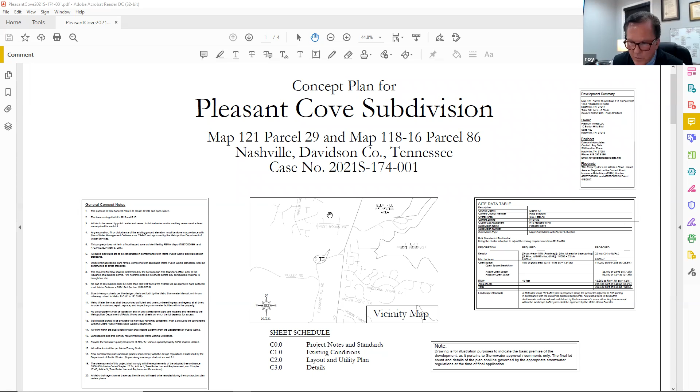I'll show you where the property is. So here we are. So this is Pleasant Hill Road, and this is the subdivision that it abuts. Russ, I'm not sure what the name of that subdivision is, but it abuts a dead-end cul-de-sac called Island View Court. And so this property has a point of access there. It also has a point of access on Pleasant Hill Road. Again, it's zoned R15. It's 8.96 acres.

And so there's a provision in the Metro zoning ordinance that allows you to develop properties in a manner called a cluster subdivision. Most, if not all, subdivisions right now are done as clusters because of Metro stormwater requirements; you have to have some open space, you have to have stormwater areas, and those almost all the time have to be outside of lots themselves. And so when you're developing a piece of property knowing that you're going to have these important features, you will utilize the cluster option because you can create lots and you can also create open space. What the cluster provision allows you to do is make lots smaller. You cannot increase the number of lots, but lots can be actually smaller.

So an R15 zoning, if I go too fast, you stop me at any time, Russ, okay? So an R15 zoning means residential 15,000 square foot lots. The R designation also allows you to build 2 houses on a single lot. It does not allow you to do that on every lot. It allows you to only do that on 25% of the lots. I think the subdivision that we're abutting was done as an old zone lot division years ago, where you could actually have 4 houses on one lot or 2 houses on one lot, and the lot line went right to the middle of the houses. So that's quite unusual itself. Metro does not allow us to do that anymore.

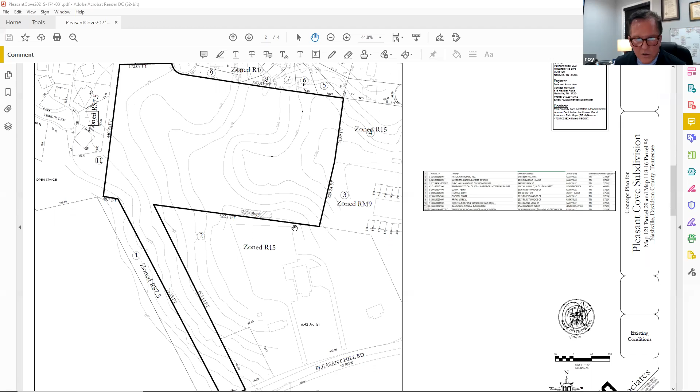So you'll multiply the total area by 43,560. You'll take a percentage of that, 85%, and then you divide it by the base zoning, which in this case is 15,000. And when you do that, you're allowed to have 22 lots. So I did a plan that basically divides this property into 22 lots. And more or less, this is what it looks like.

There was a reserve parcel at the end of this street that my client owns. So we're going to access Island View Court. Before we did a plan on this at all, there was a sit down with planning, just to see that they were generally okay with what we were proposing. And they said that we were. And so, this is the step. We have submitted this plan to the Planning Commission for review. They're in that review process right now.

So this road off of Island View Court comes in. This property is split down the center with sort of a hammerhead at the end. You could put a big round circular turnaround there, which Metro requires from a fire marshal perspective, or you can actually do what's called a hammerhead, as long as this distance is not more than 150 feet. And it actually allows you to lay the property out a lot better by not having the big circles in there. So they're really nice rectangular parcels. So you can have 22 lots.

Under the R zoning, 25% of those lots can be lots that you put 2 houses on, but those lots have to be full size lots of 15,000 square feet. So you'll see that here's a larger lot. Lot 18 is a larger lot. Lot 22 is a larger lot. Lot 8 and lot 9 and lot 10 are all larger lots. You could put 2 houses on each of these lots. The lots that are narrower and they're 60 feet wide would have 1 house each. So that gives you the ability to have 22 lots with 5 of those lots having 2 houses. So that'd be 27 total units.

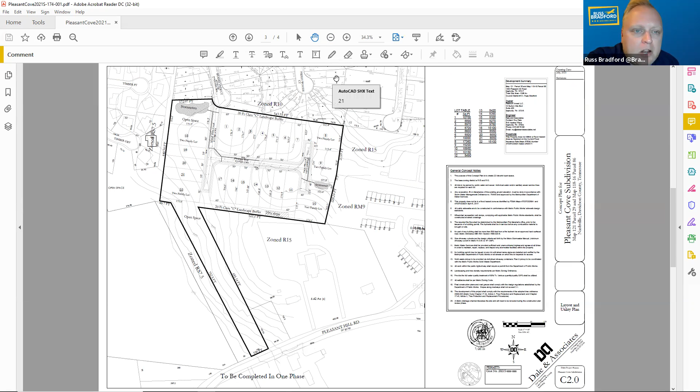And one question I have with the open space that connects to Pleasant Hill Road, was there a reason why that area wasn't looked at as being the way into the community and not coming off of the other cul-de-sac? Because there might be some concern with the people who live on that cul-de-sac. I'm sure there will be. I mean, I looked at a lot of those, and a lot of those probably are rental properties. It doesn't make any difference. There are people that live there.

And my client went to the planning commission on the front end to look at more or less that. I think the thought was that if you connect to Pleasant Hill, then you're going to be forced to make that connection to Island View, and then it's going to be a cut through. So it's something that we can certainly talk about. I'm not sure if people would want that connection or not. Planning in their review, although they looked at this before, came up with the same question again. So it's something that they're considering. There may be some alternative here we can talk about outside of this subdivision itself. I just want to hear what people's reactions are, I guess.

Is there anybody in the meeting that lives on that cul-de-sac? If there's a local resident on this call, feel free to either unmute or put your questions in the chat.

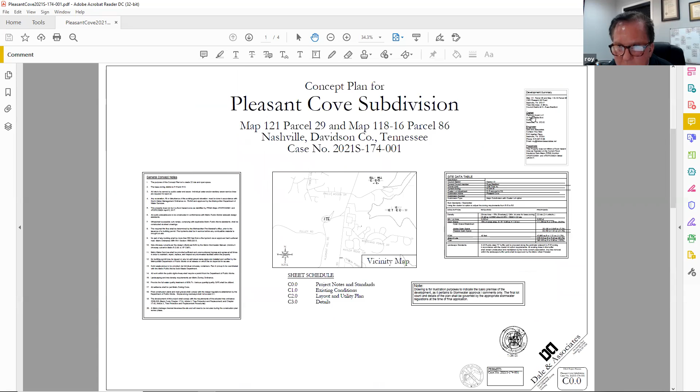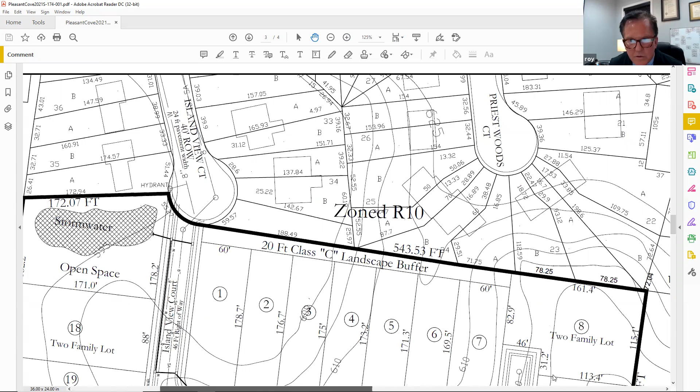And who is the developer or the builder? Well, he has a company, but his name is Bruce Little. Little or Whittle? Little, Little. And what's his company? I think it's on the plan. I think he has a couple of different companies. You know, people set up LLCs for individual projects, and this is the LLC that I think they set up for this one. And it should be on the plan that I sent you. Platinum Invest LLC.

And Roy, can you explain the concept of the two houses on one lot? Sure. Would they still be single family? Are they duplexes? How would those be laid out? So when you have an R zoning and you're allowed a, we'll call it a 2-family lot, you could do a duplex, or you could do 2 freestanding buildings. What I've tried to do is to lay this out so there's enough room to do 2 independent detached buildings. That's why these particular lots are wider.

That cannot. And so essentially in the eyes of Metro, just for terminology's sake, we call all of them two-family dwellings, whether they're attached or detached. To allow for independent ownership, they would need to set up horizontal property regimes on each lot to do split sales. Otherwise, an owner would own one side, rent the other side, or own one structure, rent the other, without the HPR to enable split sales of the property.

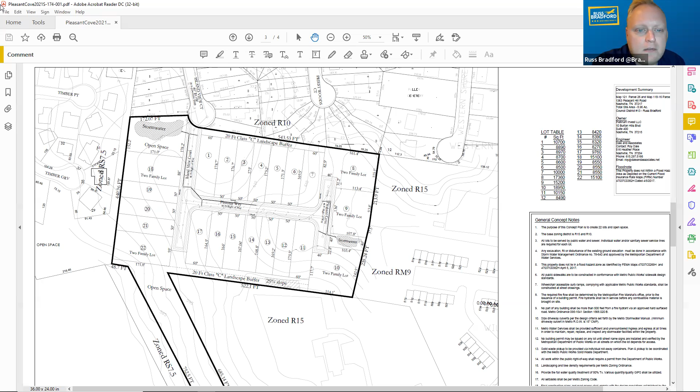Are there any other questions from anyone on this call that we've not already discussed? Okay, well, hey, Matt, like I said, oh, go ahead.

Yeah, I hope I didn't confuse you, and Matt's here to help us as well. I think what I was trying to say, and quite honestly, my client didn't even ask me this, but when I look at this layout, I think you could do a similar layout with private roads, and you could probably do it off of Pleasant Hill since it's a private road, and then those connections would not necessarily be required. In order to do that, it may cost a little more, but if you did consider rezoning it, he might get a little more density, not much, but it's just an alternative.

So if you get a lot of pushback from the people on Island View, I think there might be an alternative that could be looked at. I'm sure my client's going to want to go ahead and proceed just to get his concept approval since he's already paid for that and he's through the process. But I think there's always a way to go back and look at it if you think we need to. So I hope that helps. It does.